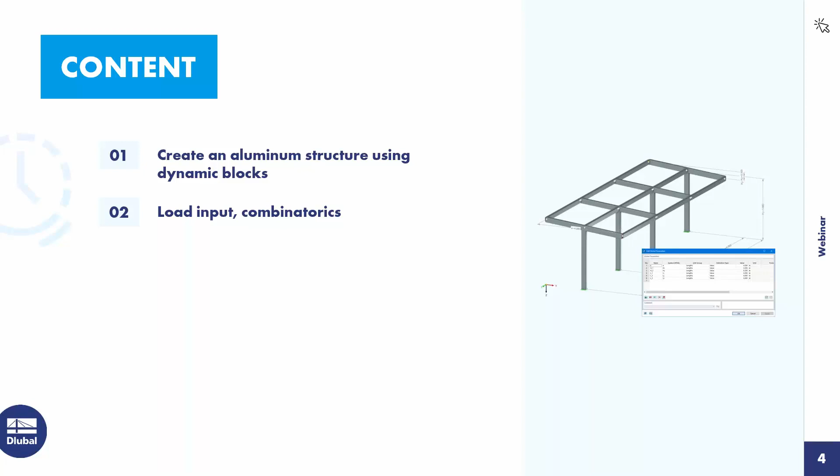I come to the agenda. First point is create an aluminum structure using dynamic blocks. Then load input and combinatorics. Then the design of the structure according to Eurocode 9. And the printout report documentation.

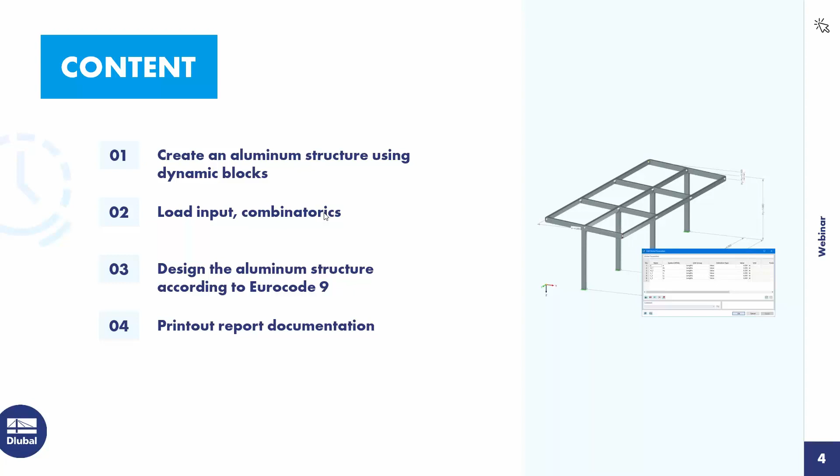This construction can be modeled by entering objects in graphic or tabular form directly in RFEM. This has already been shown in detail in previous webinars. In addition, there's also the option of saving object groups as a block and then reusing this block. In RFEM, 3 block types are distinguished: non-parametric blocks, parametric blocks, and blocks with JavaScript. I would like to introduce you to all 3 block types.

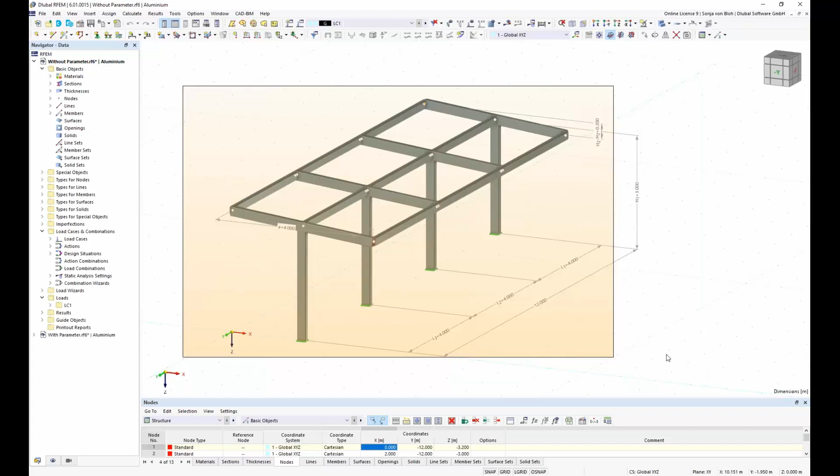In the case of a non-parametric block, the structure has been created without parameters. The model that you see here was created this way. Here, the node coordinates are defined by values; no formulas are used. In order to save the structure or partial structure as a block, it must first be selected. I want to save the entire structure as a block, so I select the entire structure.

Then I go to File and then Save as block. Here I have to enter the name and I also have the possibility to do a classification. The classification is used as a filter so that I can find the block more easily. A few categories have already been created. Here I choose the category beams.

The block can now be inserted into any file. I insert the block into the same file. For this, I open the Dlubal Center blocks that manages these blocks. Here are many blocks included. You can see here the beams, then you can use the tower and masts, and so on for your daily work.

I first switch to the filter in which I saved the block, and then I select the block. I find it here. Then I go to OK. In the main tab, I can set the insert point of the block by choosing the node in the graphic.

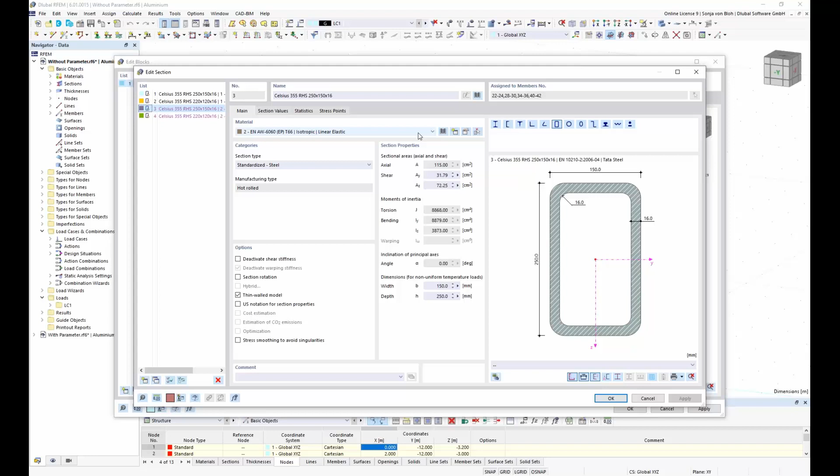I now click on OK, and the block will be inserted in the file. The block reference is not lost. I can edit or convert the block to normal geometry.

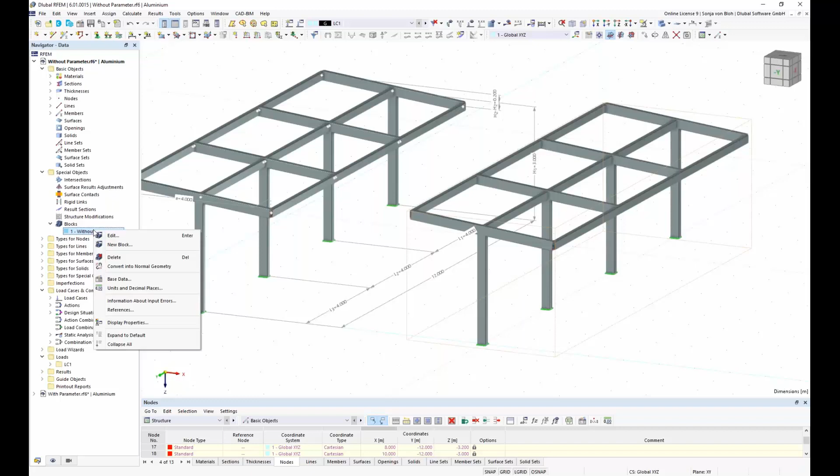I find the block here in Special Objects, blocks without parameter, and if I want to edit this block, then I choose the Edit button, and here I can edit the coordinates or the structure. If I change here the coordinates to 15 meters, then the block will be moved. You see this here. There's also the possibility to use the function directly in RFEM, moving this block by drag and drop.

That's all for the blocks without parameters.

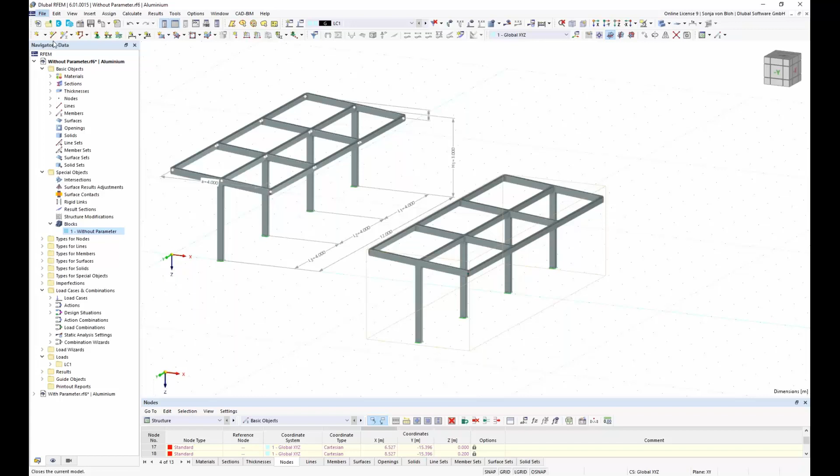In the case of a parametric block, the construction is entered so that the structure depends on parameters. I've prepared such a model that you can see here. In addition to the geometry, loads can also be parameterized.

The parameters can be set in the global parameters window. Here I have already created the lengths A, H1, H2, L1, L2, and L3. They have the unit group lengths, but I can choose another unit group as well. Here you have forces and moments and so on, if you want to use parameters for forces or loads. I've selected the definition type value, but you also have the possibility to use formulas.

I have defined the coordinates using these parameters via a formula. You can open the formula if you click on this symbol here. And here you can see the node coordinate y is calculated as minus L1, minus L2, minus L3.

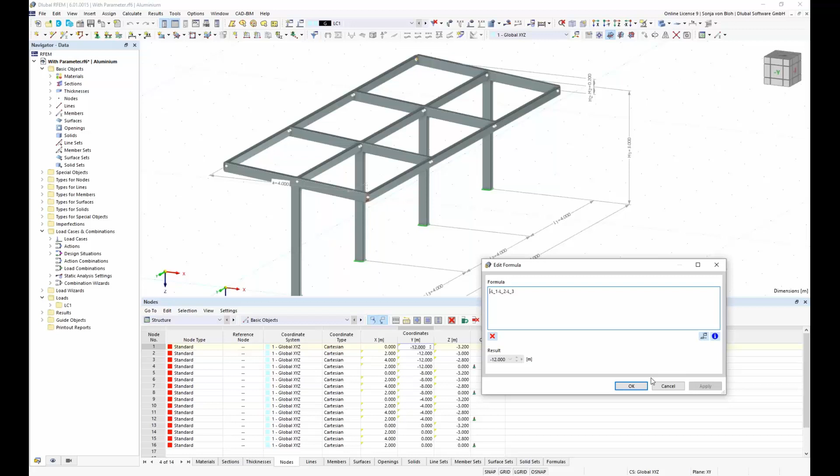If I now change the parameter, the structure will be changed. I can change it back as well.

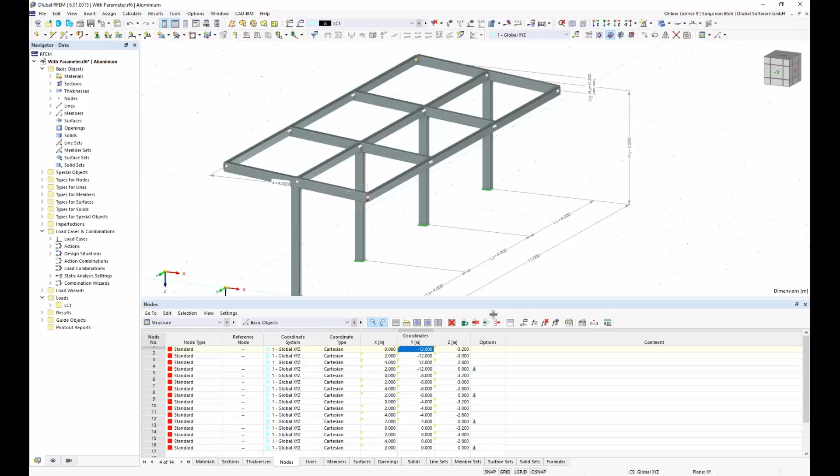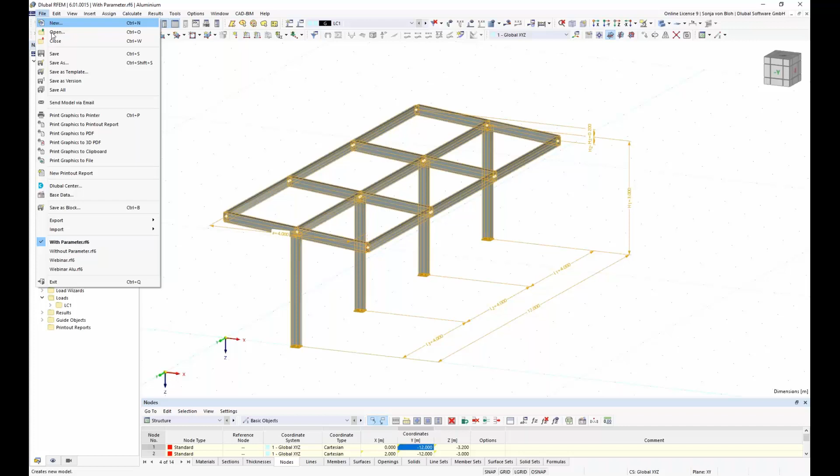If I now want to save this structure as a block, I have to select the structure again. I want to save the entire structure, so I select the entire structure. Then I go to File, Save as Block, give it the name 'with parameter', and also the model category Beams. Click OK.

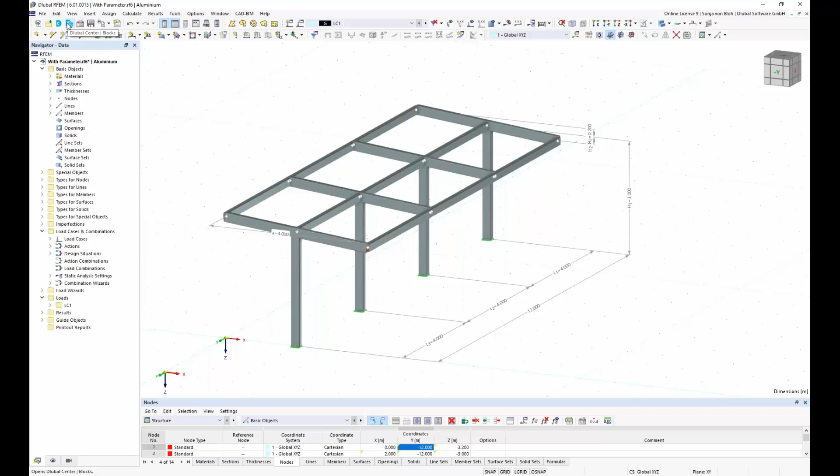Then I will insert this block into this file. For this, I open the Dlubal Center blocks, and in the filter Beams, I find this block. In the main tab, I can do the same things as in the other block. I can choose the insertion point. And then I go to the structure.

Here I have the same possibilities as in the other block. I can choose the material, the cross-section, and the nodal support. But in addition, I also have the global parameters that I defined in the structure before, and here I can change these lengths as I want to. I click on OK.

The mapping to the global parameters is lost. If I insert this into the file, I can see this if I change the global parameters. Click OK. Then only the structure with the global parameters will be changed, not the structure that I've saved as a block. But you also have the possibility to edit the block parameters in the structure tab.

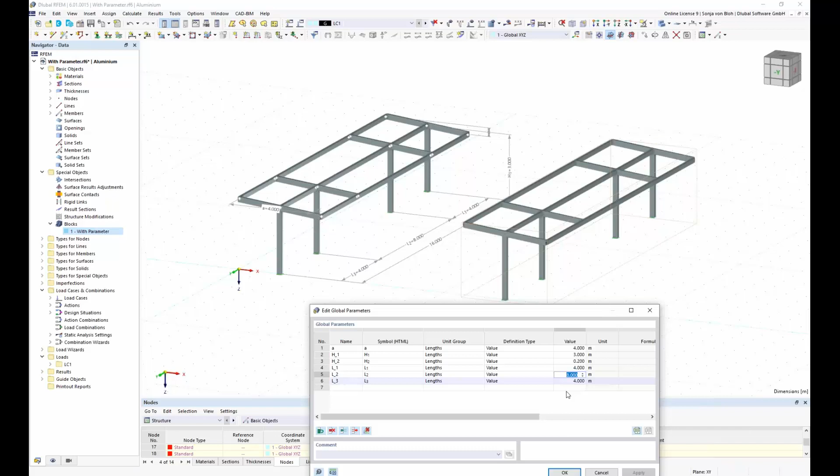If I now change the parameters, in both structures the parameters will change.

However, with the parametric block, it's not possible to add or delete structure objects within this block. If I saved the canopy as a block with 4 columns, as in the example, I cannot add a 5th column within the block. I can add this in RFEM, of course, but this possibility to create dynamic blocks is possible with blocks that use JavaScript. This brings me to the third block type: blocks with JavaScript.

With scripting, I can create the topology, the load cases, and the loads. For the creation of script files, you only need an editor like Notepad++.

I created a JavaScript file to generate the canopy presented earlier. The 3 main functions - global parameters, input data, and generate - are available for defining blocks. I only used the input data that you can see here and the generate function in my script. The global parameter function is not used in my script file.

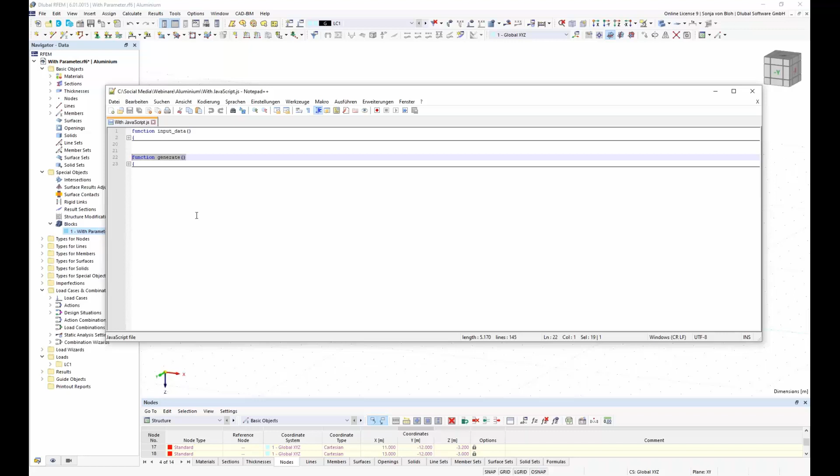The global parameters function is used to create global parameters, which, as I have already shown, can also be used in the blocks. The input data function is used to create the input table in the block dialog with input parameters.

Here I show this function. In the input data function, a category can be created in the blocks input table using the category function. This is this here - I've created the categories Basic Data, Geometry, Supports, and Sections.

In the Basic Data category, I then use the parameter int function to create an input parameter n, of type integer. This is used to dynamically generate the number of bays.

In the category Geometry, I create the input parameters a, H1, H2, and L with the function parameter float. The parameter L is created dynamically via the multiplicity counter key n, which I defined above in the parameter int.

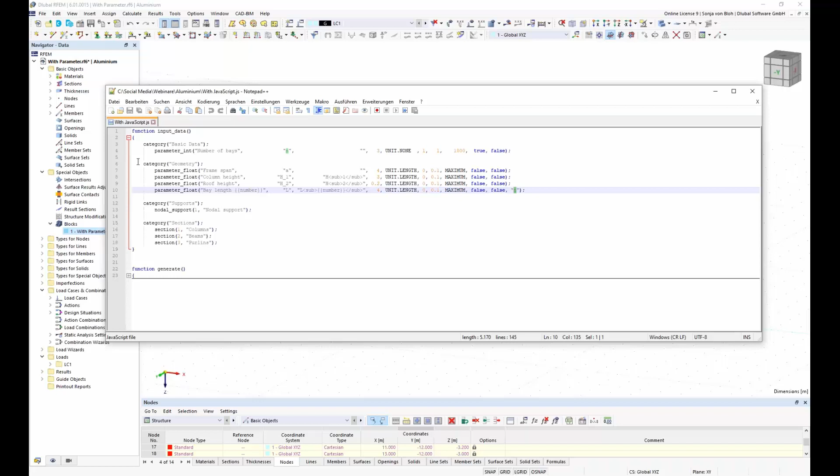The function generate is used to generate blocks. Input variables added in the input data function can be used in this function. A list of the available objects and attributes can be found in the console via the info that you can open here in View Console.

And if you click here on info, then you can see the object properties - here, maybe, member hinges with a description.

The nodes are created here, also the members and the supports, the nodal supports. And here I also create, in this function, the dimension with linear dimension.

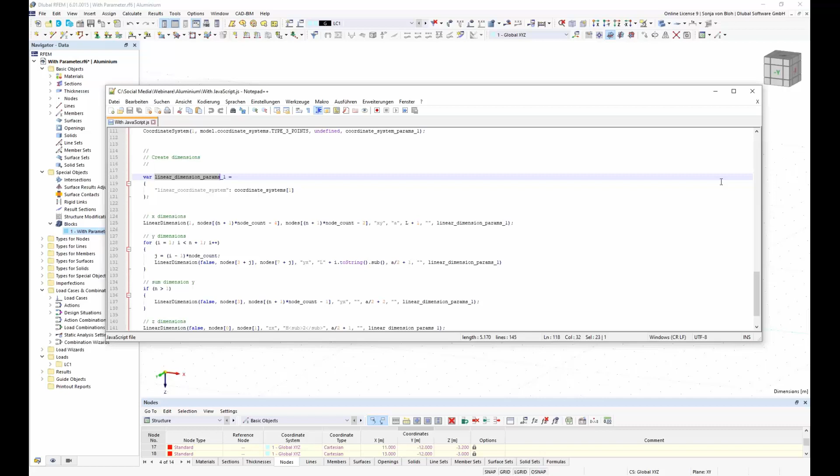A documentation on the blocks with JavaScript will be available later on GitHub. To create the block, the function for creating a block can now be called in any RFEM file. The file content is only used to create the image in the Dlubal Center blocks and has no other function.

I first go to File, Save as block, and then I call this block with JavaScript. I choose the model category beams, and here I have to choose the JavaScript file. Then I click on OK.

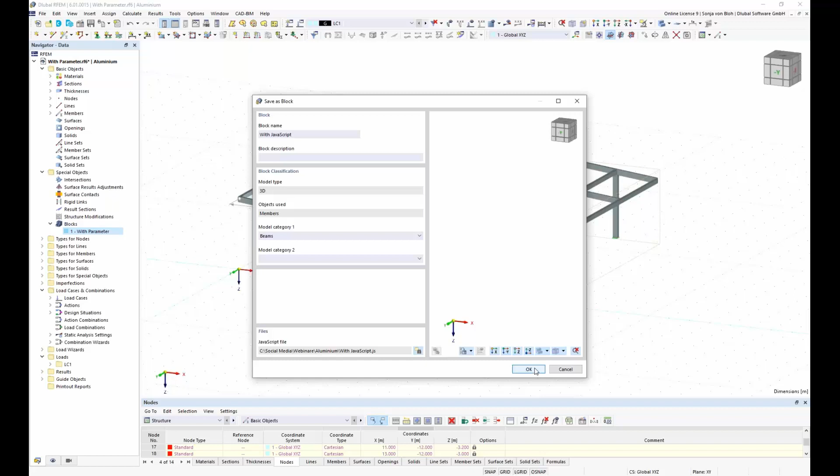If I now open the block, you have also the same option in the main tab. And in the Structure tab, you have here the number of bays n. Here I have predefined 3, that means you have 3 bay lengths that you can see here, L1, L2, L3. And to make this dynamic, I can choose here also 5, and then you can see this has changed to input L1, L2, L3, L4, L5.

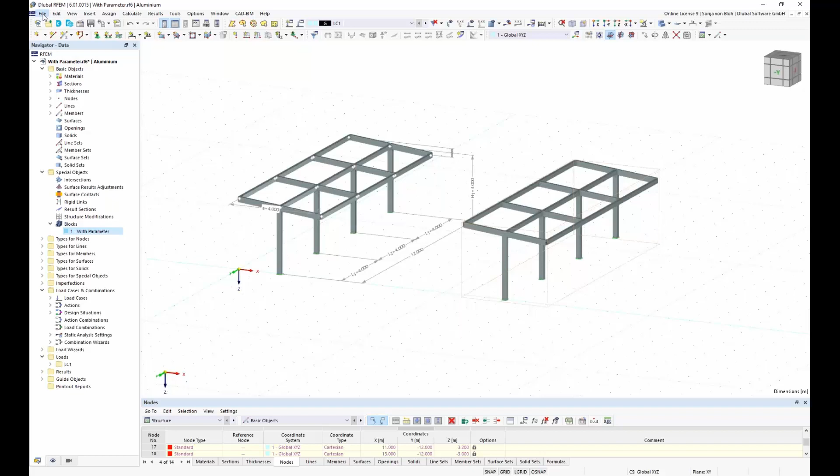This brings me to the creation of the model of the webinar. I close this file and create a new one with File New. In tab Main, I define the model name with Webinar, I choose type of model 3D, and then I go to the tab Add-ons.

Here I can select the add-ons that I want to use in my model. A green dot in front of the add-on indicates that a license is currently available for it. An orange or blue dot indicates that the add-on can only be used in demo mode or as a trial version. I select the aluminum design, and the 2 checkboxes, combination wizard and load wizard, are activated by default. This uses the combination wizard and the load wizard to combine load cases and to generate wind and snow loads.

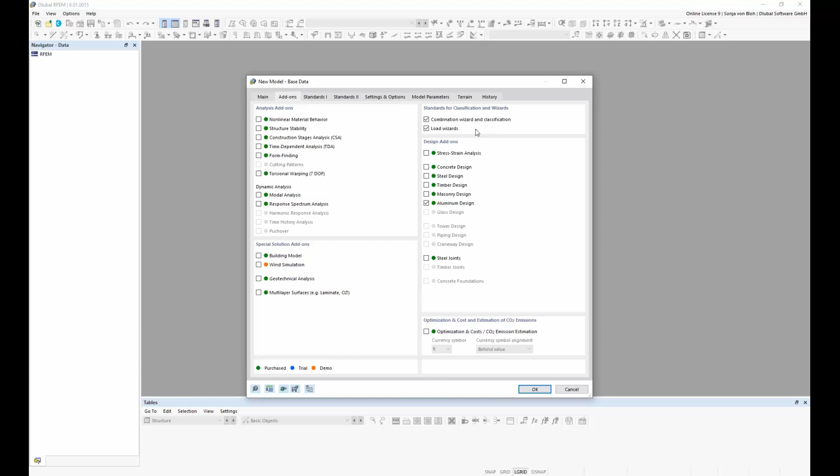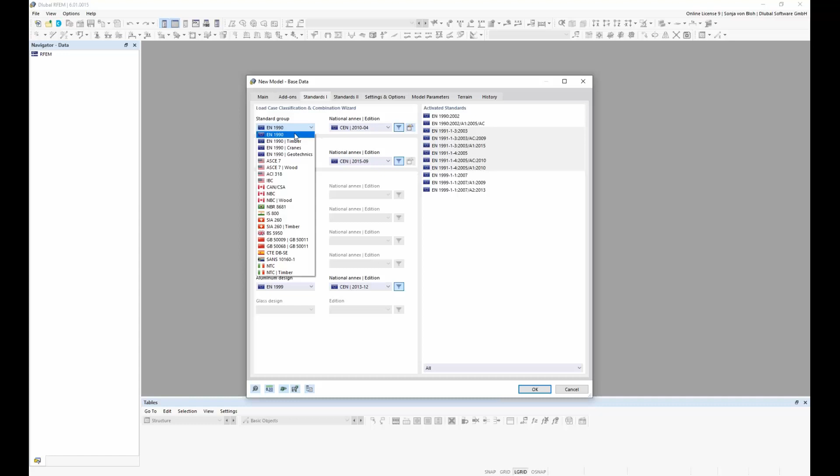Then I go to the standard tab. Here I specify the standards for the load case classification. I have here several standard groups for my choice. Here I select the Eurocode 1990 and the national annex from Germany. For the load wizards, you have also several standard groups, and here I also select the German national annex.

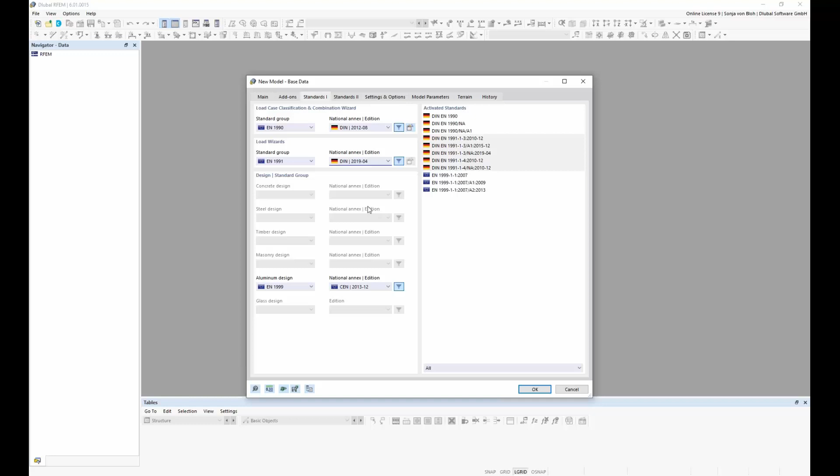For the design of aluminum, I have 2 possibilities. I can use the Eurocode or the American standard ADM. Here I want to show the Eurocode also with national annex from Germany.

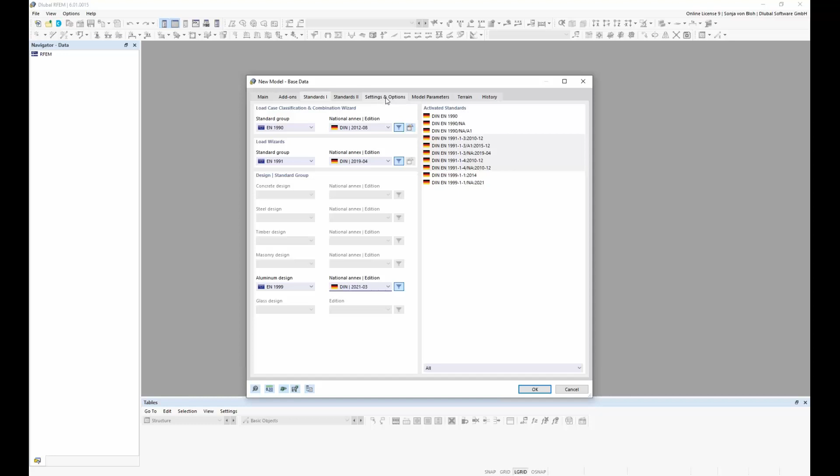General information such as acceleration of gravity and tolerances can be specified in the Settings and Options tab. Here I activate the member representatives. A member representative is a sample member with identical properties. The settings for the member representatives can then be made in the member representatives wizard. RFEM checks all members for similarities with regard to the activated criteria and outputs the result as a list.

I can then assign properties such as effective length via the member representative, which defines these properties for all members of this member representative. This means I don't have to assign these properties to each member individually. Furthermore, I can easily find members with the same properties via the member representatives.

Then I go to the tab Model Parameters. Here the geographic position of the model can be specified and information about the model can be entered. I want to assign a location here. To do this, I click on the 3 dots here, and here I have to enter the location.

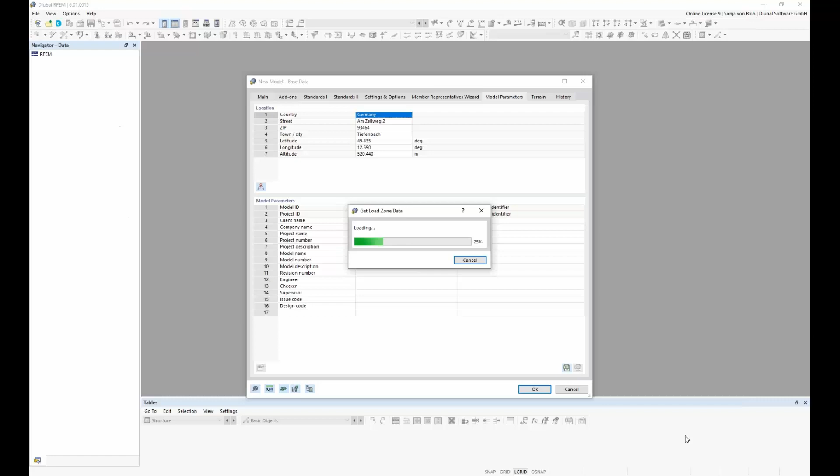I choose our company headquarters, that's located Am Zellweg 2 in Tiefenbach. And then I can confirm my choices with OK. And the load wizard for snow loads and for wind loads then uses the load values of the specified location.

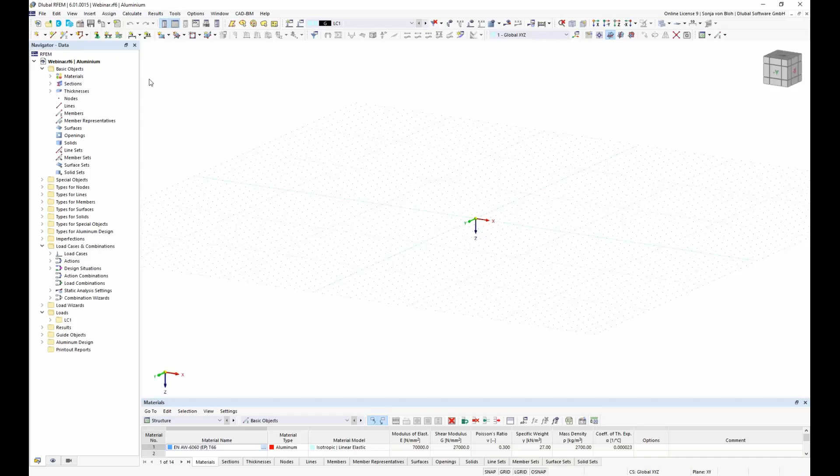And I click on OK. This will create a new file. And to create the model, I insert the block I created earlier. For this, I open again the Dlubal Center blocks, go to the filter beams,

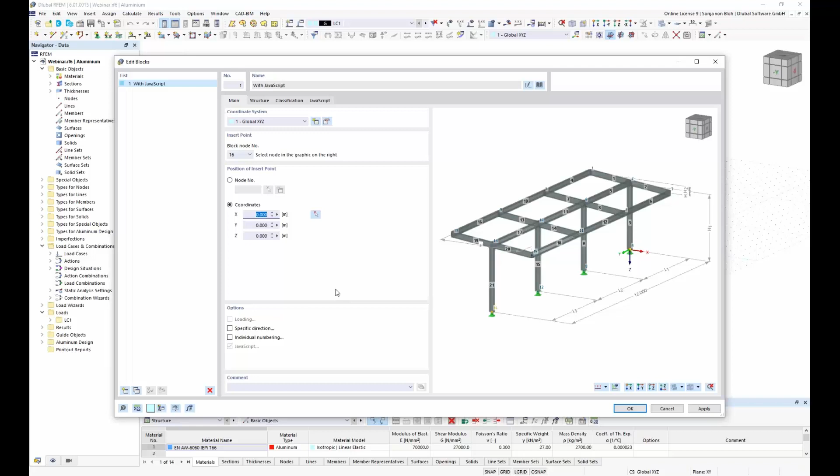and choose my block with JavaScript. I then click on OK. I choose the insertion point numbers 16, and I define the x coordinate in 2 meters.

Then I go to the Structure tab. Here I choose a different nodal support, here I choose this type. And for the purlins, I choose a different cross-section.

The model has been created so far, so that I can now create the load cases. The load case LC1 is automatically generated, that's a load case self-weight. And the active self-weight checkbox is already activated here, so that the self-weight of the structure is automatically generated as a load.

In the static analysis setting here, I can select which calculation theory should be used to analyze the load cases. Analysis types are already preset for this. Here I have the analysis according to first order, second order, and third order. If I don't find the static analysis settings that I want to use, I can create a new one, or I can edit the settings here in the Edit Static Analysis Settings tab window.

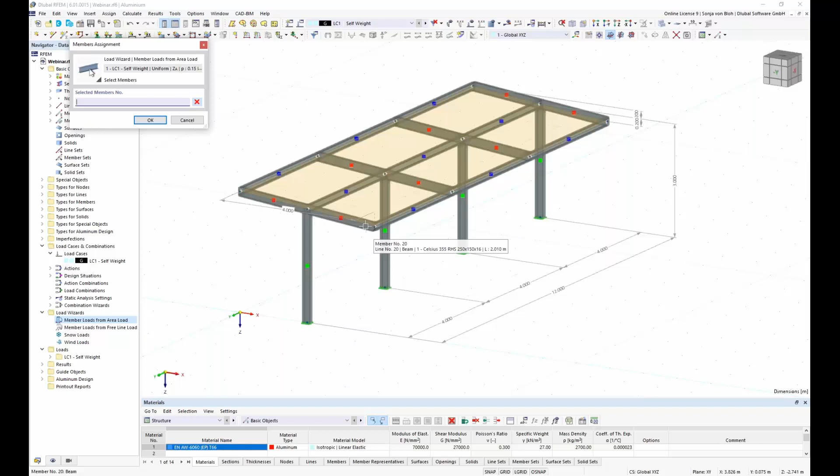Then I go to the next tab, and here I have to define the load plane. For this, I select the corner nodes in the graphics with this function. And then I click on OK. Furthermore, I can specify here which member should be excluded from the load application. Here I choose members parallel to the beam. And then I click on OK.

The load can also be displayed separately with this function display separately for control purposes. Here you can see the load distribution. Okay, the load is okay. And then I define the next load case. Here with new load case, I want to define a snow load. So I give this load case the name snow. Then action category should be snow. And then I click on OK.

For this load generation, I also use a load wizard, and here we have the load wizard snow load. This load wizard simplifies the task of creating snow loads on members of the model in accordance with standards. So I create here the new snow load, and in tab main I have to choose which roof type I have. Here I have the choice between flat and monopitch and dual pitch roof. I have a flat or monopitch roof, so I choose this option. Then I have to define the roof corner nodes.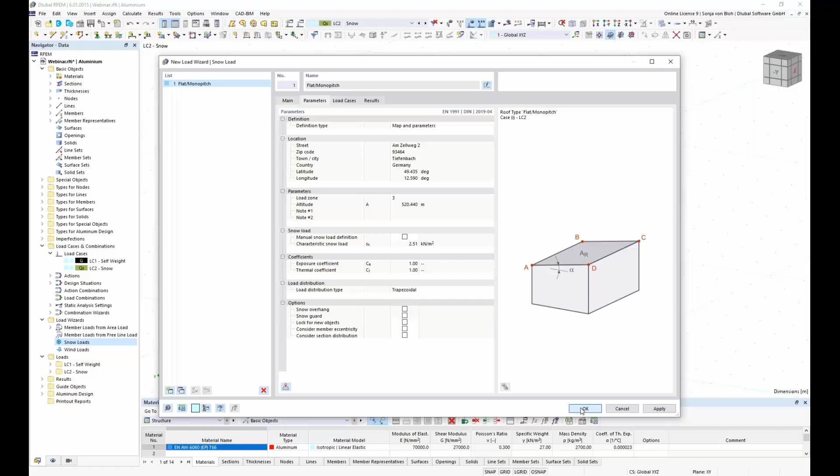Furthermore, I can activate additional options such as snow overhang or snow guard, but unfortunately these functions are not yet finished. But I wanted to also consider a snow overhang, so I will define this manually. Then I click on OK. I can also show this load separately, and then I define my snow overhang with a new member load.

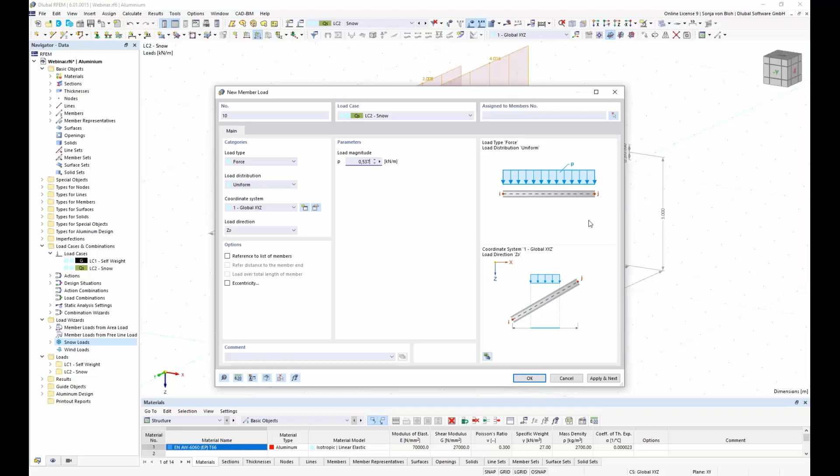For this, I change the load direction to global Z on projected length, and I define here the load magnitude. This should be 0.537 kilonewton per meter, and then I choose the member where this load should be applied on, and I click on OK. Snow load is finished, so I have to define wind loads.

If a canopy roof like this should be designed, a load determination with regard to section 7.3 of Eurocode 1991-1-4 is required. We have only load wizards for closed buildings that you can see here. That's the load wizard for wind loads, but they are only for closed buildings. So I have to apply the load manually or with the help of RWIND. How to determine the load manually is described in the knowledge base article. I want to show you this article here.

On our homepage on Dlubal.com, you have here the tab Support and Learning, and you can find many knowledge base articles here or frequently asked questions here. And in this article, it's described how to determine wind loads for canopy roof structures. Okay.

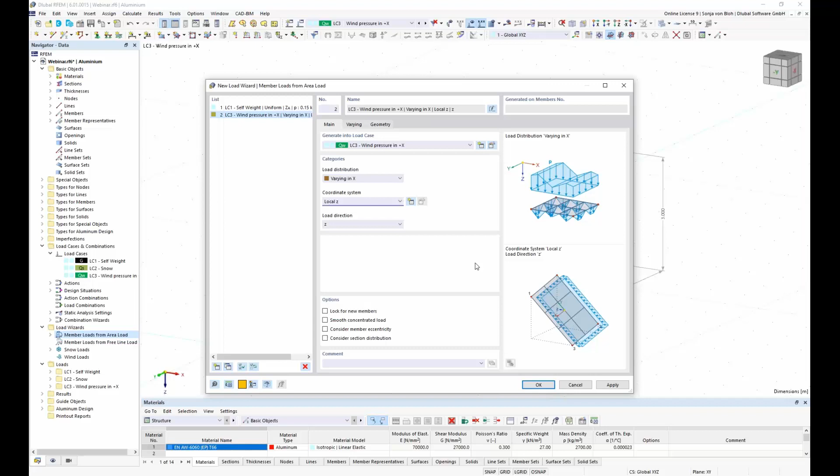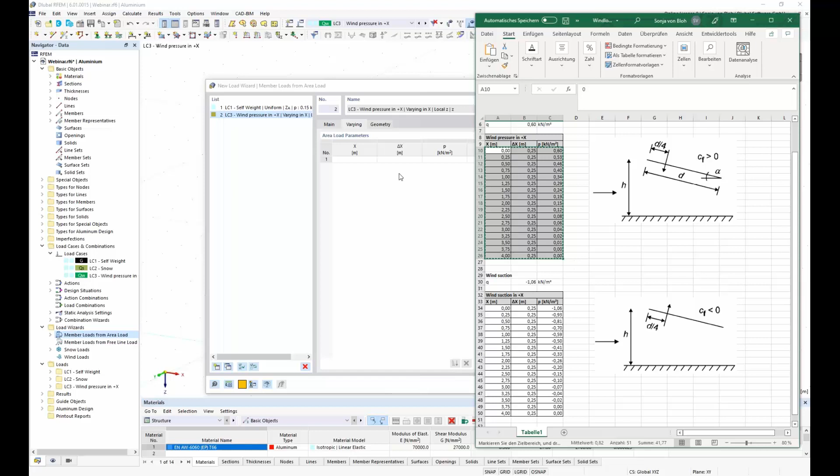Then I use the load wizard member loads from area load, and here I choose the load distribution varying in x, and I want to apply the load perpendicular to the load plane, so I choose here local Z, and then I go to the tab varying. Here I have to define the area load parameters. I've calculated it before with Excel according to the technical article I have shown you before, and here I copy the load parameters and paste them here.

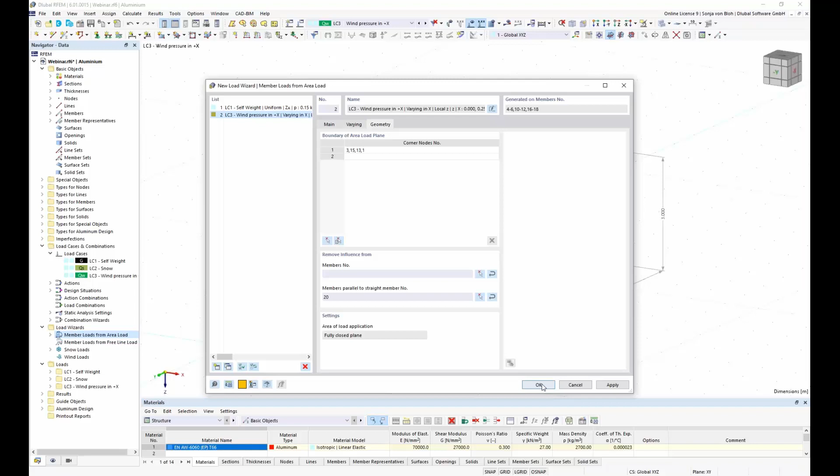Then in the geometry tab I have to define the boundary of the area load plane. For this I choose my 4 corner nodes, click on OK, and I don't want the load to be applied on the members, so I select the member and then I click on OK. I can also show the load here as area load. Here you can see the parabolic distribution of this load. The second load is the wind suction in +x direction. For this I copy the wind pressure in +x direction.

I rename this load case. This is now wind suction.

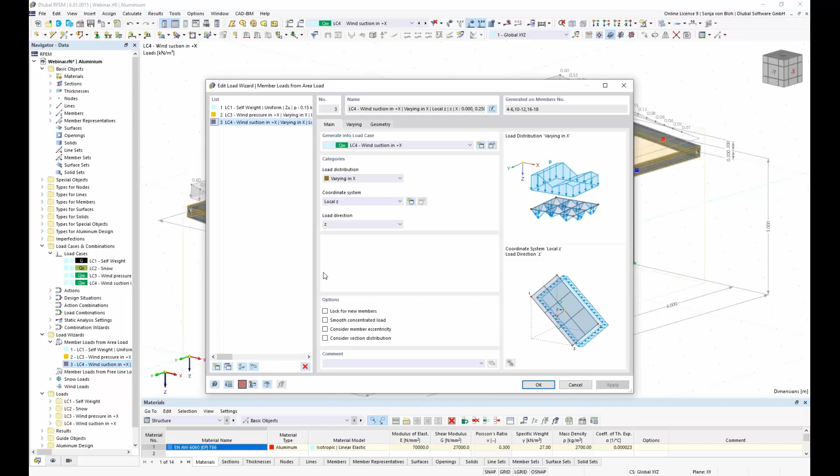Click on OK. I only have to change the parameters in the member loads tab to varying. For this, I copy the wind suction parameters, and click on OK.

Wind loads are finished. In a stability analysis, I determined that the influences from second order theory must be taken into account. How such a stability analysis can be done has already been shown in previous webinars. So I have to generate load combinations according to the second order theory, and apply global imperfections.

For this, I create the imperfection case, imperfection in plus x. We go here to imperfection, then new imperfection case. This should be my imperfection in plus x.

Here I choose the imperfection type, local imperfection. There are many more imperfection types.

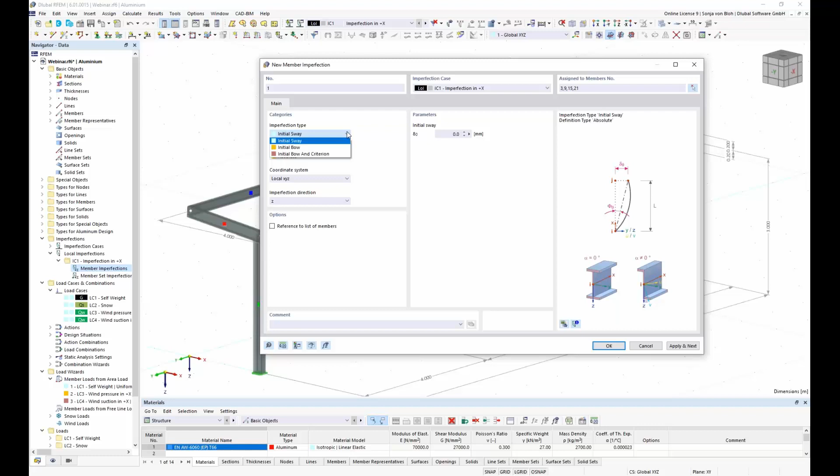Then I have to choose the imperfection type. Here you have the possibilities: initial sway, bow, and so on. I choose here initial sway, and you have many definition types.

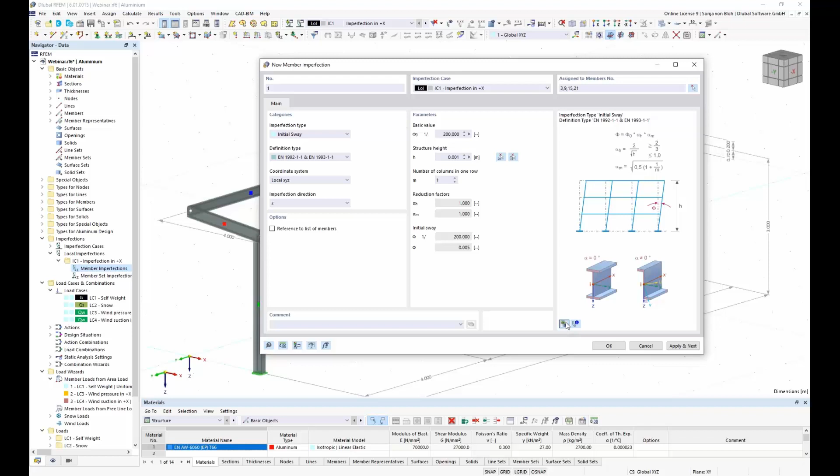I want to define the imperfection according to a standard, so I choose the standard, and I have to define the imperfection direction. If you want to see the directions, you can click here on this button, and then you can see the result.

And I want to assign this imperfection in plus x direction. This is the local z direction here in this case.

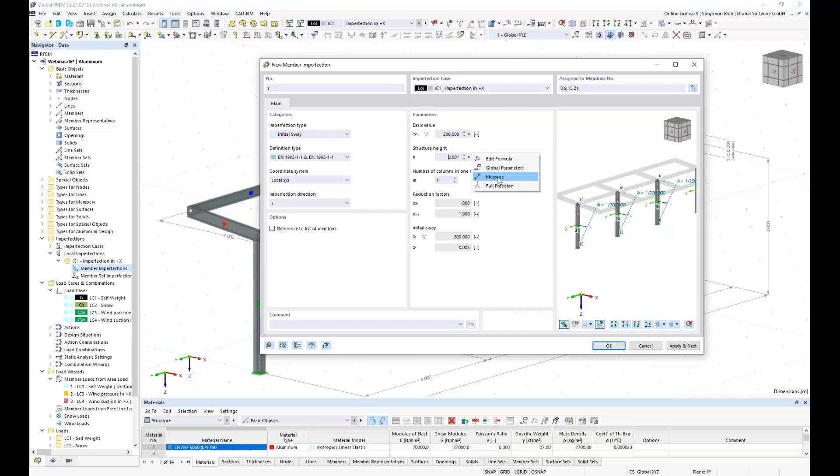Then I have to define the structure height. I will measure that from the column. And the number of columns in one row is 1 in this direction. So I click on OK, and the imperfection is created.

I can show this with this button here. The other imperfection will be created by copying this imperfection. So I click here on copy selected imperfection. It's the imperfection in minus x direction.

I click on OK. Then I only have to change my imperfection direction to minus z. Here I can see the results.

Then I need an imperfection in plus y. Here I have the imperfection direction y, and in this direction I have 4 columns, so I choose here 4, and click on OK.

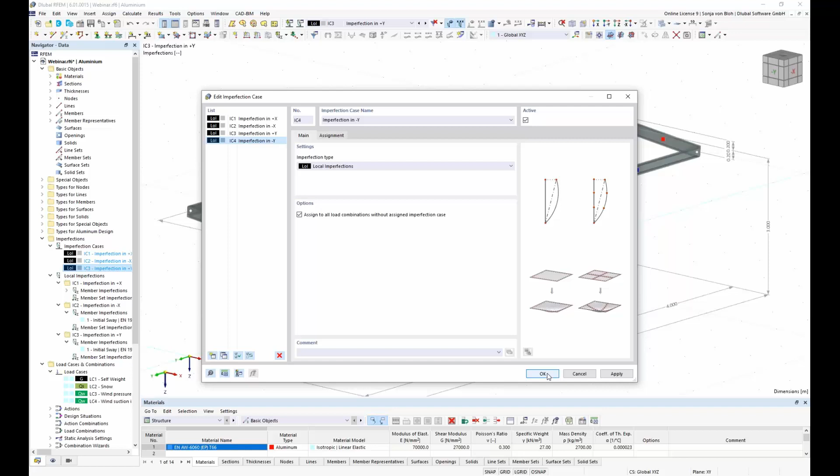Last imperfection is the imperfection in minus y.

Now the imperfections are complete, my load cases are complete, and so I can make settings for the combinatorics.

For this, I go to the load cases and combinatorics, to the combination wizard.

I'm defining here the second order analysis, and then I activate the checkbox generate same load combination without imperfection case, and that's all what I want to do here.

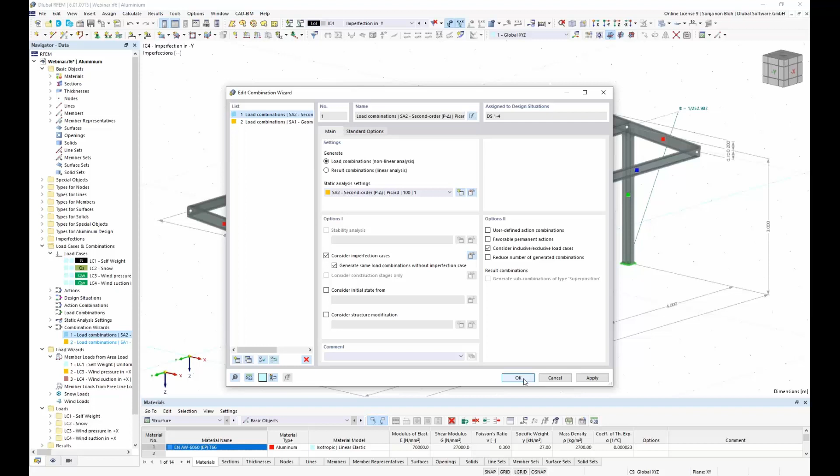Okay. Furthermore, I make settings for the actions. For this, I open the Action tab, and the action category corresponds to the category of the corresponding load case.

For action category permanent, I have here assigned the self-weight. For the snow loads, the snow. For the wind loads, the wind.

And in the action type, this controls how the load cases of the action are taken into account in the superposition. Here you have the possibility to use the action type simultaneously, if they can act in the same load combination, or alternatively, if they don't act together. And they don't act together, so I choose this option here.

Then I go to design situation. The standards describe how the actions are to be combined. As Eurocode 1990 requires designs of the ultimate limit state and the serviceability limit states, for which specific combination rules apply.

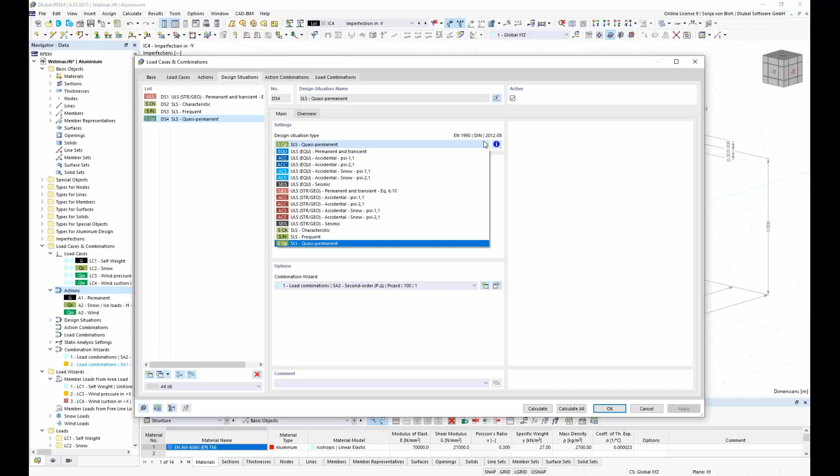This is considered in the program: the 3 design situations that you can see here are automatically generated by default. However, I can also add other design situations. If I click here on this button, create new design situation, I can also choose the design situation type that I want to use. And on the info button, you get information on the combination rules of this design situation type.

Then I go to load combination. That generates my load combination here. Static analysis settings are second order, that's what I wanted to have. So the combinatorics are okay now.

So I click on OK, and then I have to make my aluminum settings.

And this I want to do with the member representatives, and RFEM has detected 3 member representatives. These member representatives are colored with this quadratic symbol here. It's here the green one, the red one, and the blue one. And these are the columns, the beams, and the purlins.

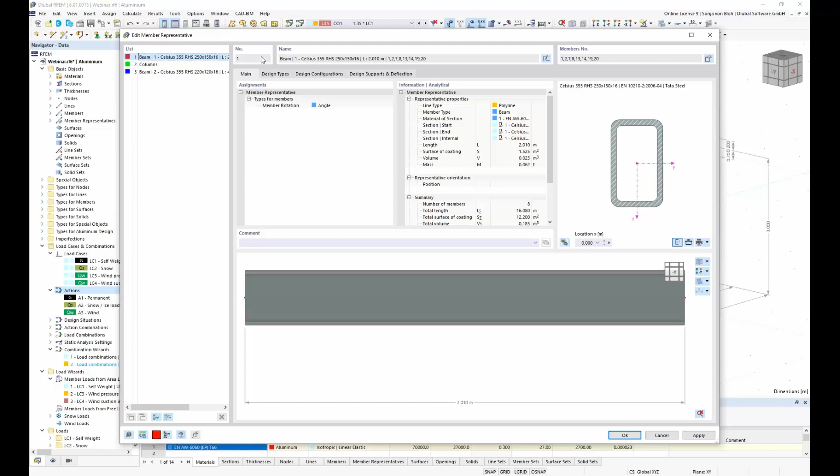I can give these member representatives also a name. And so I double click on this member representative. I can give them a name. I name this member representative columns. And the first one, I name it members. And the third, purlins.

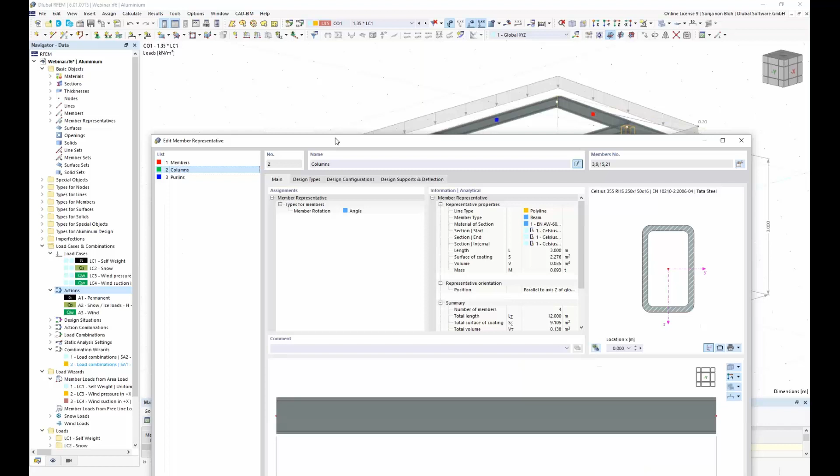Okay, then I go to the tab design types. Here I have the possibility to define effective lengths, local section reductions, shear panels, and rotational restraints. And first I create a type for the effective lengths for the design of the columns. For this I click on create new effective lengths.

First, it must be specified which forms of stability failure exist for the member. According to Eurocode 9, the possibility of torsional or lateral torsional buckling for hollow sections can be neglected, so I deactivate the checkboxes torsional buckling and lateral torsional buckling. However, these checks are not performed by default. In the ultimate configuration, I can also make other settings for this. I will show the ultimate configuration later.

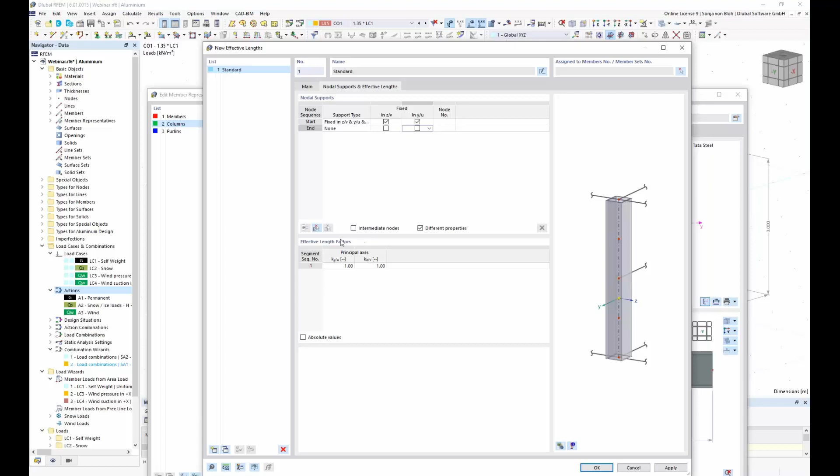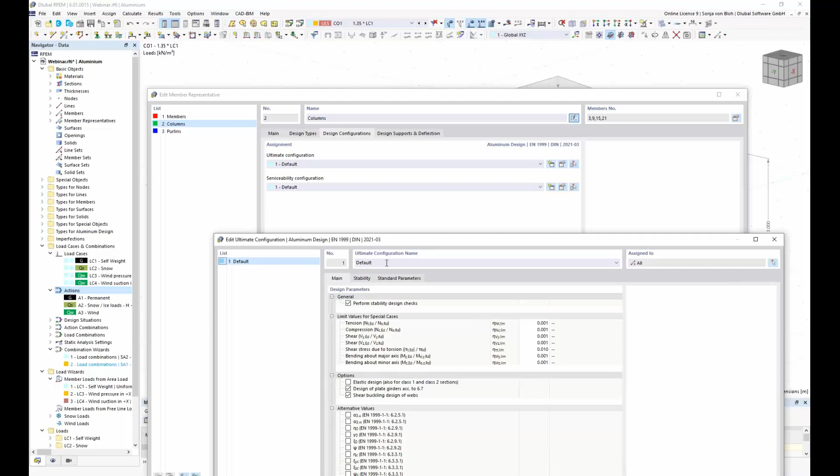Then I go to tab nodal supports and effective lengths. Here I define my nodal supports and the effective length factors. This is okay. And I'll start by looking at the ultimate configuration in the design configuration tab. Here I go to edit and I name this ultimate configuration columns. And here the stability design checks are activated.

Here you have the possibility to define alternative values that are described in the standard, or here you have the possibility to perform the design for sections like the hollow section that I mentioned before if you activate this checkbox. Okay, go on OK.

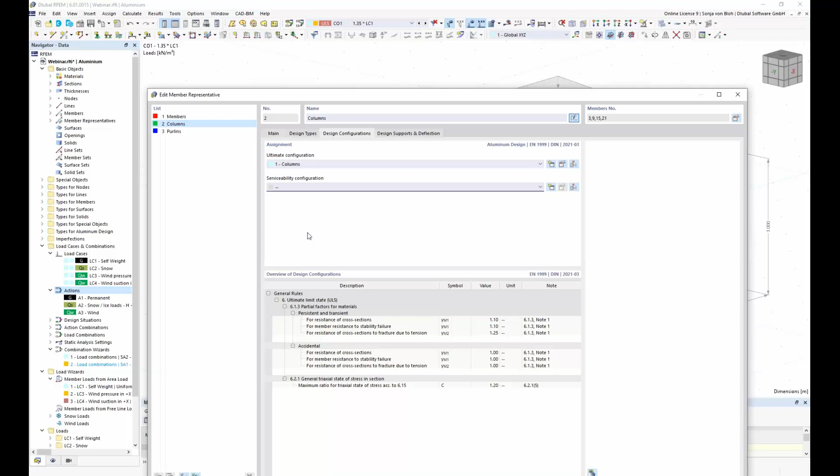If no design configuration is assigned to an object to be designed, then no designs are carried out in this configuration for this object. I don't want to do a serviceability check of columns, so I don't choose a configuration here. Then only the ultimate configuration will be used, and only the stability checks and cross-section checks will be done.

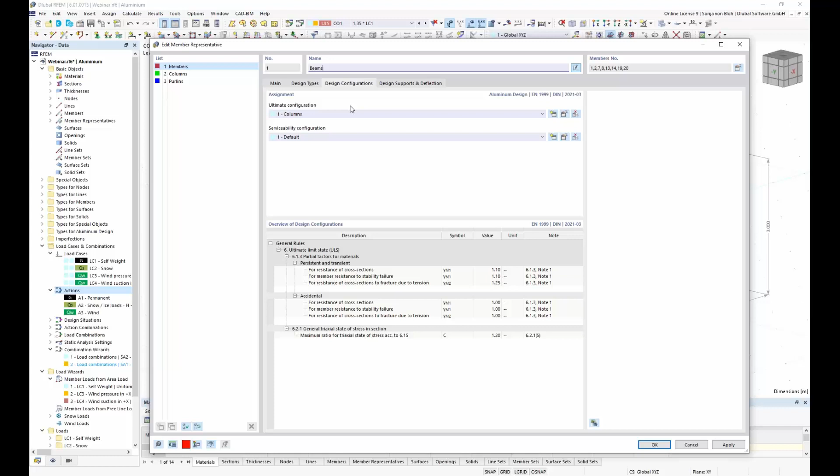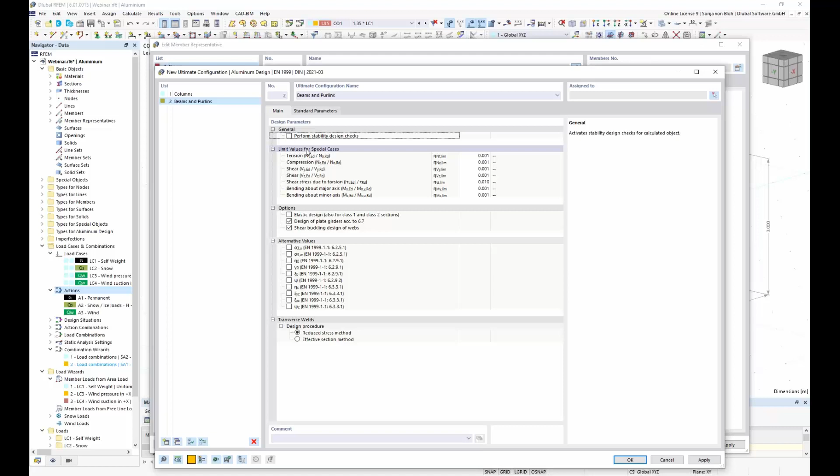Then I go to member representatives. Here I wanted to name this beams. Oops, beams instead of members. And in this member representative, I don't want to do a stability design, so I create a new ultimate configuration. I go here on, and I name this beams and purlins, and here I deactivate the checkbox perform stability design checks. Then I click on OK.

Then I want to see my serviceability configuration. For this, I click on Edit Serviceability Configuration to open this window. And in the serviceability configuration, the limit values to be checked for the design can be specified. The deflection limits are defined as a fraction of the reference length. A distinction is made between the cases of beams and the cases of cantilever here in this section.

Okay. Then I go to the tab Design Supports and Deflection. For the aluminum design, the beam type is derived from the defined design supports. If I define a support on both sides of the member, the type is interpreted as beam. If a support is only defined on one member side, the member type is interpreted as cantilever. Depending on the type of beam, the limit values defined in the serviceability are used.

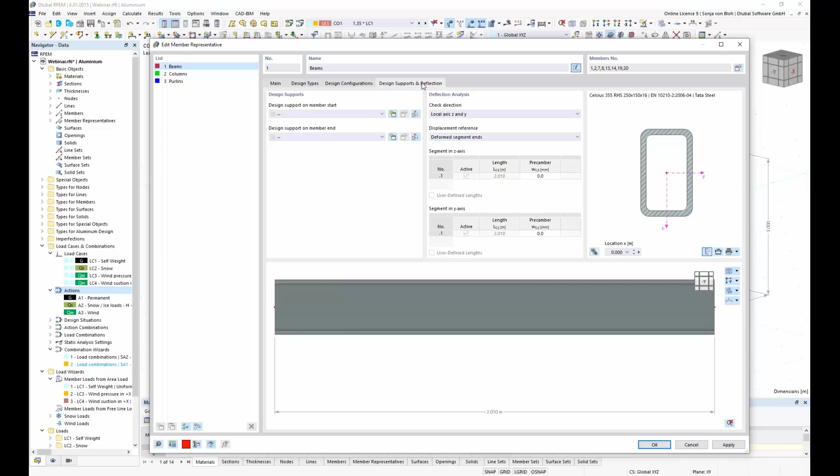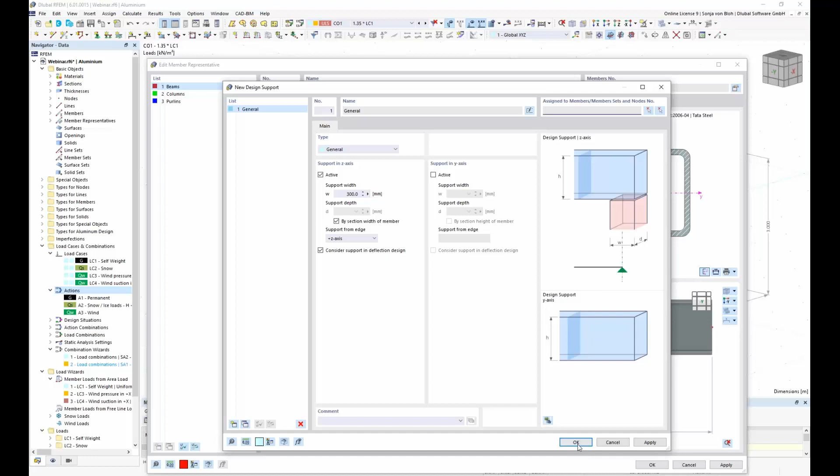Here I have a cantilever, so I only define a support on the member start. For this, I click on New Design Support, and here I activate the support in Z-axis. You have here the possibility to define the support width and depth. This has no influence on the design. Then I click on OK. Then I choose the check direction. The check should be done only in local axis Z.

Displacement reference, you have here two possibilities, should be deformed segment ends, and the design supports also take on the function of segmenting the members for the deflection check. Such design supports can be defined at every intermediate node of the member. Depending on the location, you can use this here to check different reference lengths for determining the permissible deflection. But I don't have a node here on this member, so I don't use this.

Then I go to the member representative purlins. Here I go to design configuration. I want to use design configuration beams and purlins, as I don't want to do a stability check here. And I use the same serviceability configuration.

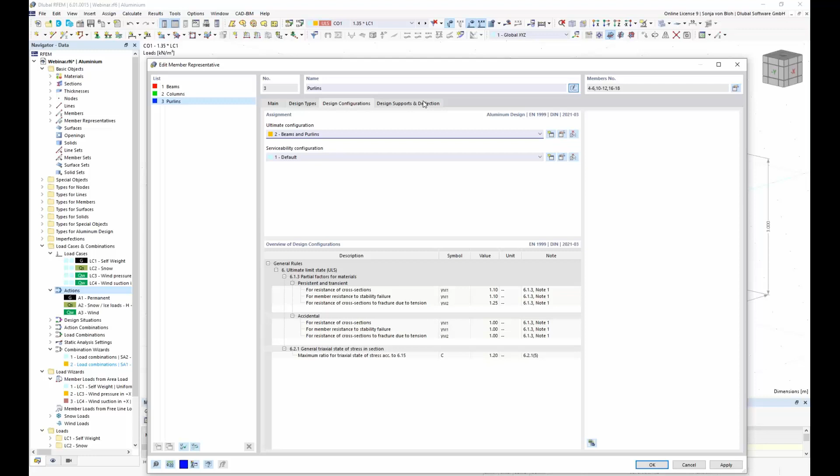Then I go to the design supports and deflection, and in this design, the purlins have supports on both sides of the member, so I use the same design support that I created before. Okay, then I choose also the check direction local axis Z, and I think, okay, now I've defined all things here.

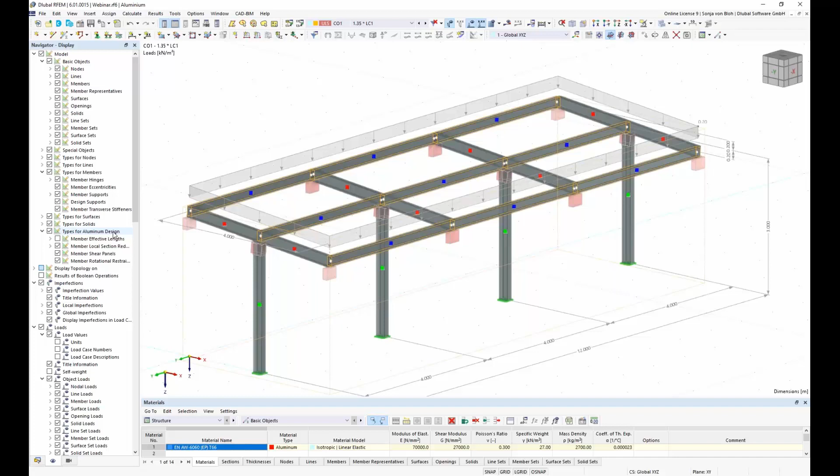All types for aluminum design can be represented also graphically. For this, I open the navigator display, and here you can see the types for aluminum design. Here you have several possibilities. You can see the member effective length graphically if you activate this checkbox. You can see that here. Or you can see the member supports or design supports here.

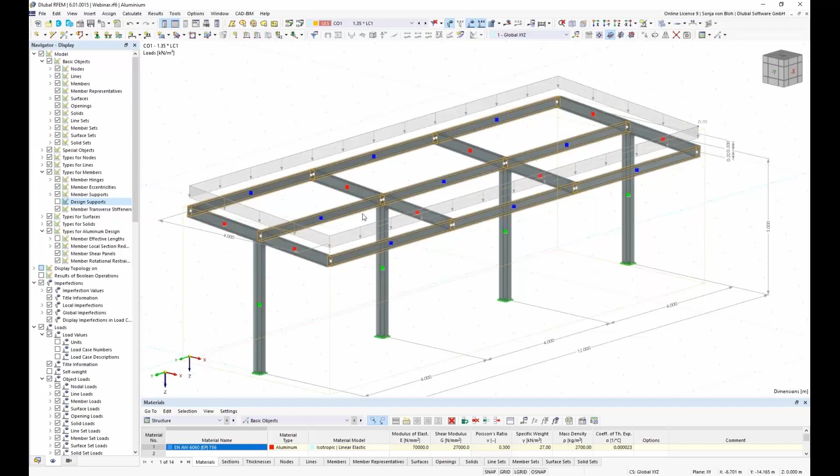Okay. This allows easy checking of the correct assignment and clear documentation of the graphic printout. I would like to show the other settings in the table. For this, I enlarge the table a little bit. Here you have the possibility to choose the table structure, imperfection, and so on. And you have also a filter for aluminum design.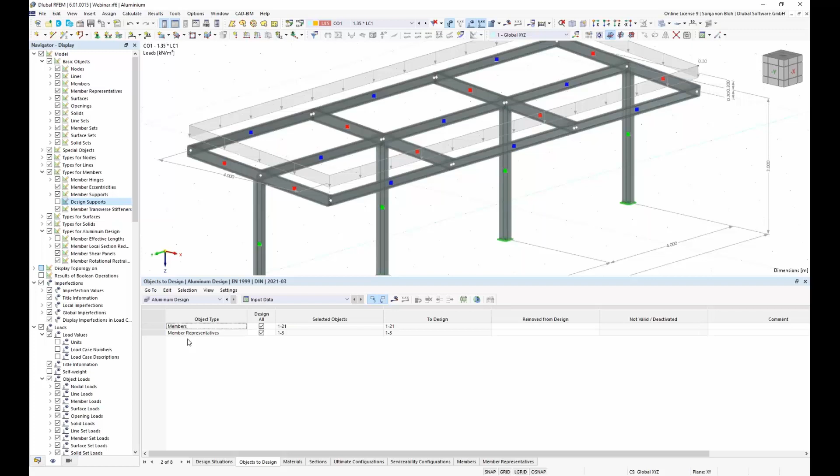This shows the tabs for the design situations and objects to design. In the design situations, this table lists all design situations that are in the model. Here you can decide whether and how a specific design situation should be taken into account for the aluminum design. I only want to check the first and the second design situation. The other one I don't want to check, so I uncheck the checkboxes. Here you also have the possibility to choose a different design situation type if you want to.

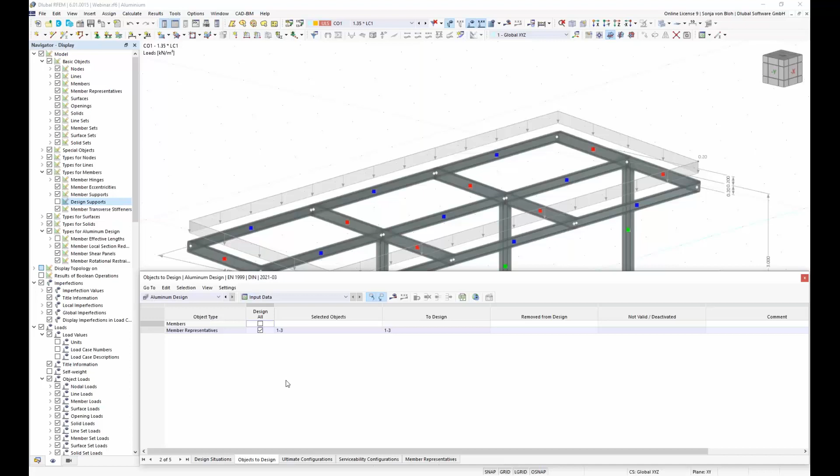Then I go to Objects to Design. All object types in the model that are suitable for design in the add-ons are listed as one row in this table. By entering an object number in the cell removed from design, you can exclude certain objects from the design. I only want to design the member representative, so I deactivate this checkbox. So all inputs are ready, and I can start my calculation. For this, I click on Calculate All.

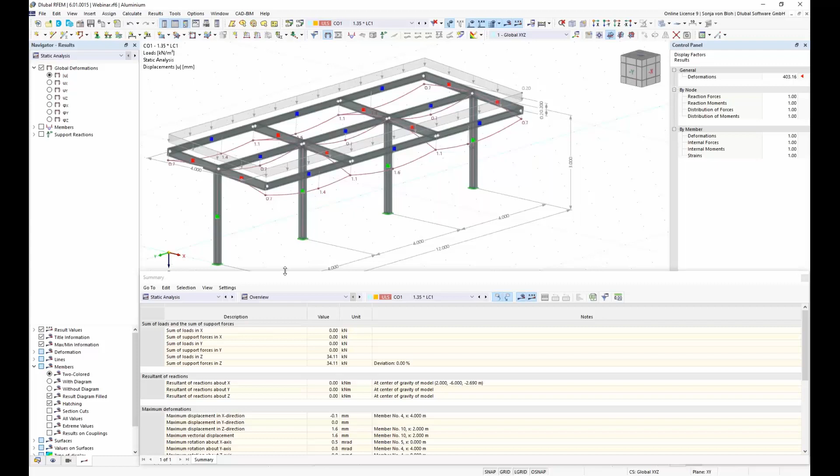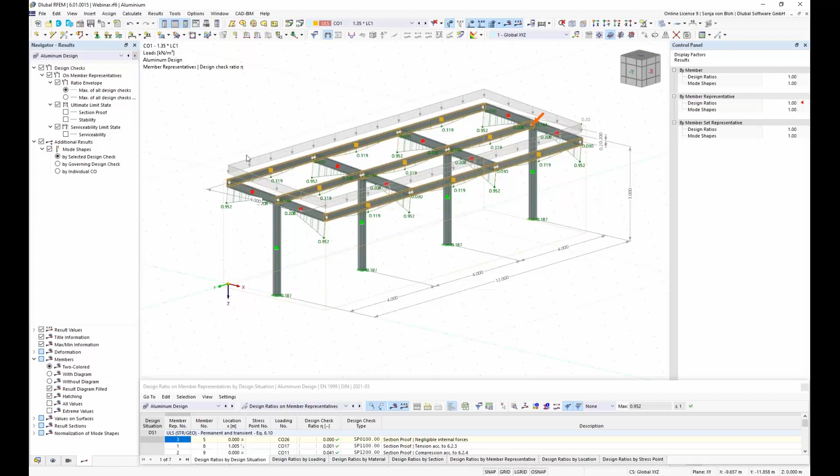After the calculation, you can choose the results navigator if you want to see the static analysis results or the aluminum design results. If you choose the entry here, you can see the design checks graphically. The design checks are also output in tabular form. For this, I choose aluminum design, and here you have many possibilities. Here you can see the governing results or design ratios on member representatives. You have several tabs: design ratios by design situation, by loading, or by material.

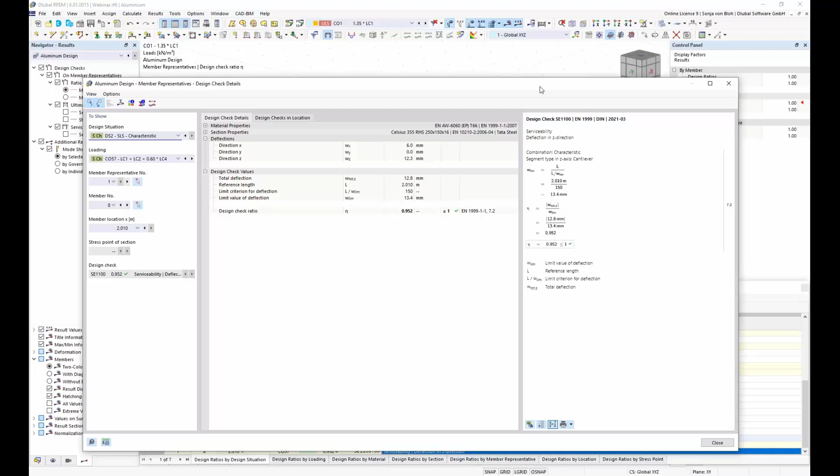You can open the details of the design if you double click on an entry in the table, and here you can see all details of the design, also with formulas. Here you can see this member is characterized as a cantilever, and you can see the design check. Further detailed graphics are also available if you click on diagram and section. Here you can choose the stresses, and then you can see the stresses on the section.

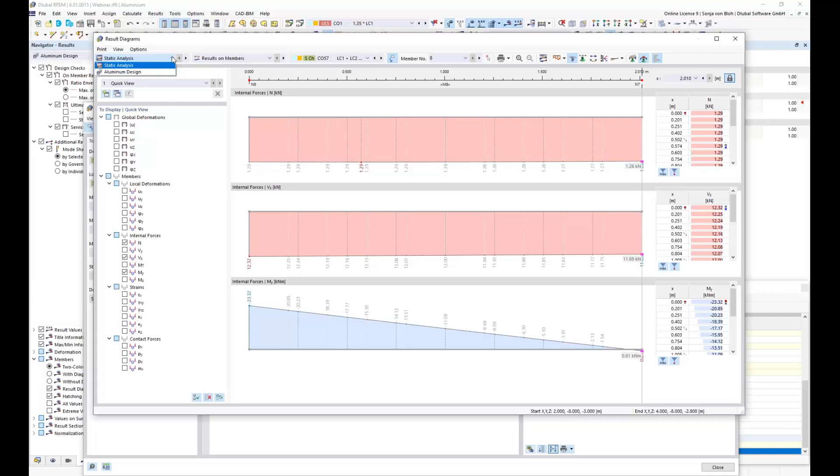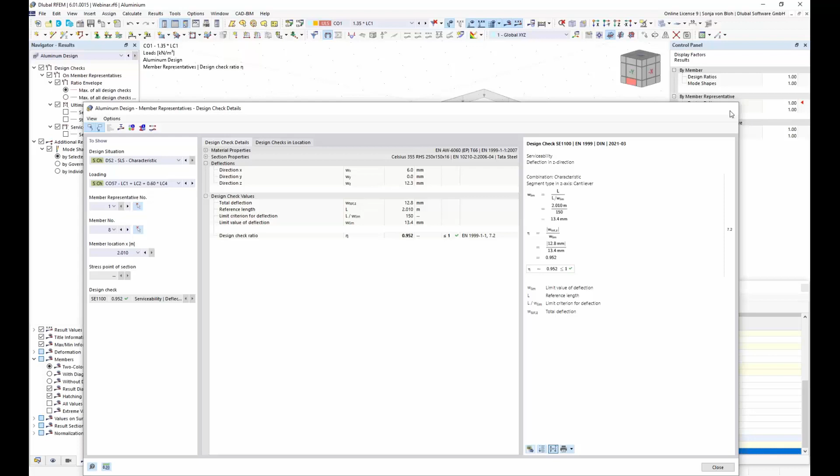It's also possible to show the result diagrams for the static analysis and for the aluminum design. Here you can choose which member representative should be displayed in the tab. Finally, I would like to show you the documentation. The aluminum design add-on is fully integrated into the main program. The functions of the printout report are therefore available for documenting the input data and results.

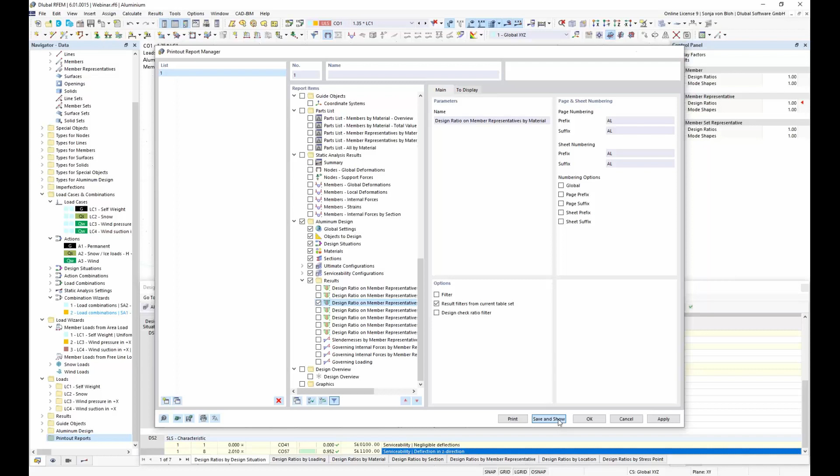For this, I go to the data navigator, and then I create a new printout report. In the list you can choose which topics should be included in the printout report. Here I activate all, then I deactivate it. I only want to print the aluminum design topics, so I check these topics. Here I have additional filter options, and then I click on Save and Show, and the printout opens. And here you have the results in tabular form.

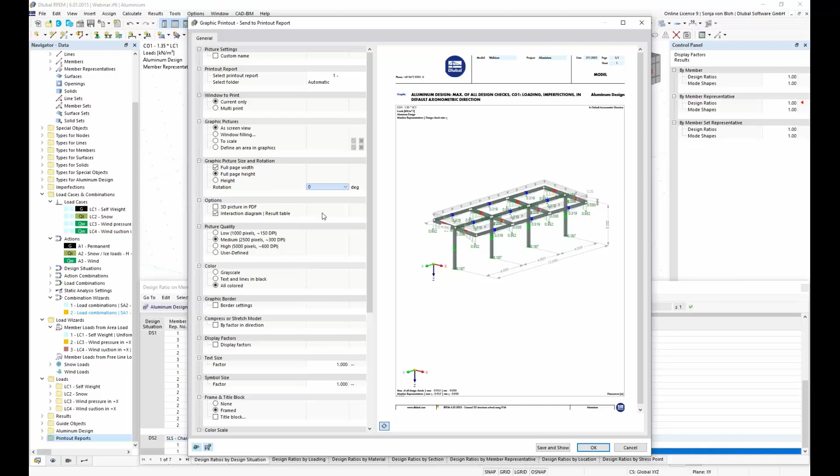It's also possible to print graphics to the printout report. For this, I go to Print Graphics to Printout Report, and then I can do the settings in this window. For the graphic picture, I want to rotate this graphic, so I choose a rotation of 270 degrees, and then I click on Save and Show.